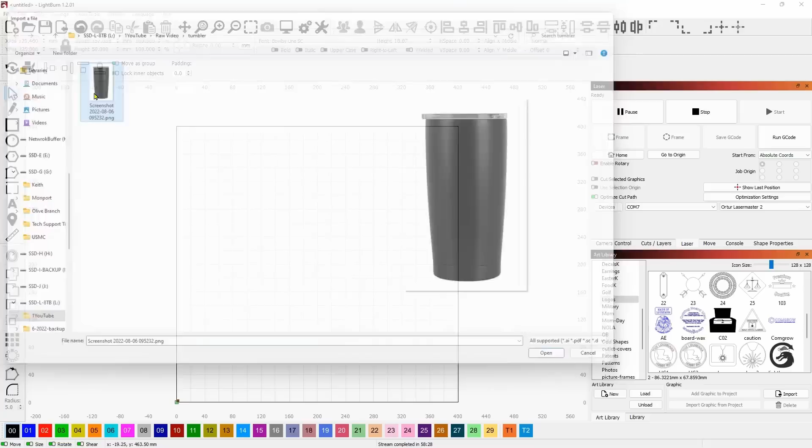All right, so the first thing we're going to talk about is, let me bring in this tumbler and how we're going to use it. Let's pretend that this is the tumbler that you're going to use right here, and it could be any tumbler, it doesn't matter what it is. The first thing we need to determine is how big is the graphic. So let's say that we have a graphic that is 2 inches by 2 inches.

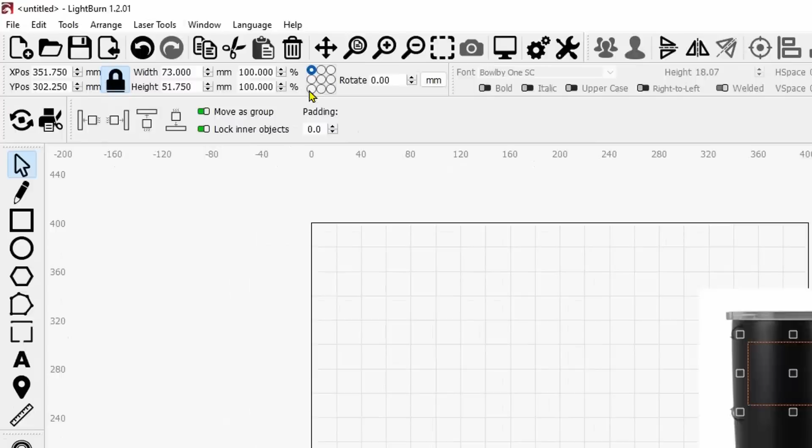Let's come up here, put this into inches, unlock it, and we're just going to say 2, press tab, 2, press enter, and relock it again - well, we don't even need to relock it, doesn't matter. So this is our actual graphic, 2 inches by 2 inches, and this is our tumbler over here. So what I'm going to do is quickly trace this tumbler.

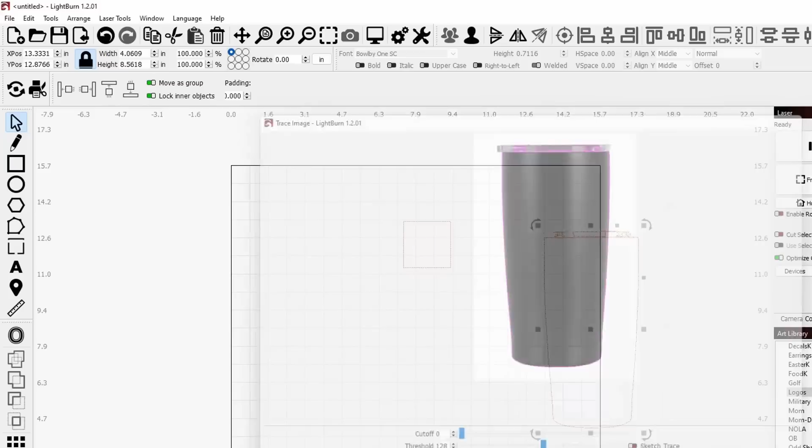And there we go, so there's our tumbler. Now let's say that this tumbler is 7 inches from top to bottom. Quickly, what I'm going to do is clean up some of this stuff up on the top so that we have an accurate representation here. So we're going to come over here and just do the height. The height we know is 7 inches from top to bottom, so I just did 7 and pressed enter, and of course it was locked.

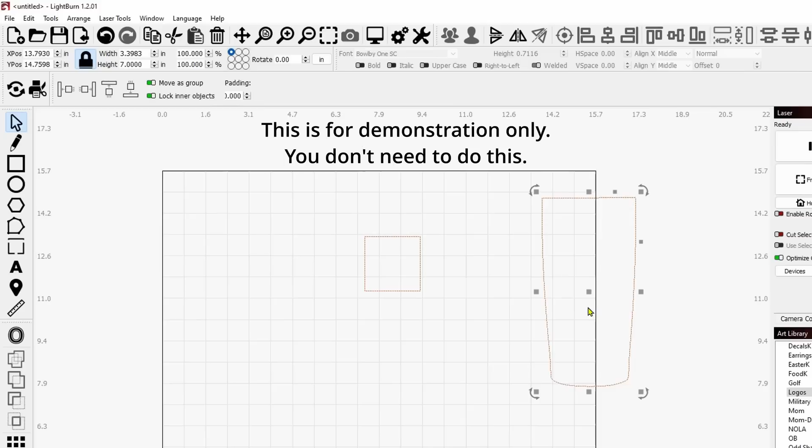So now it's proportionately sized. So now we know from the top of the anodized part to the bottom is 7 inches, and this is a pretty good representation of our 2-inch graphic that we're going to put on there. That's about how it's going to look. So at this point we have to determine where on the tumbler we need to take our measurement from.

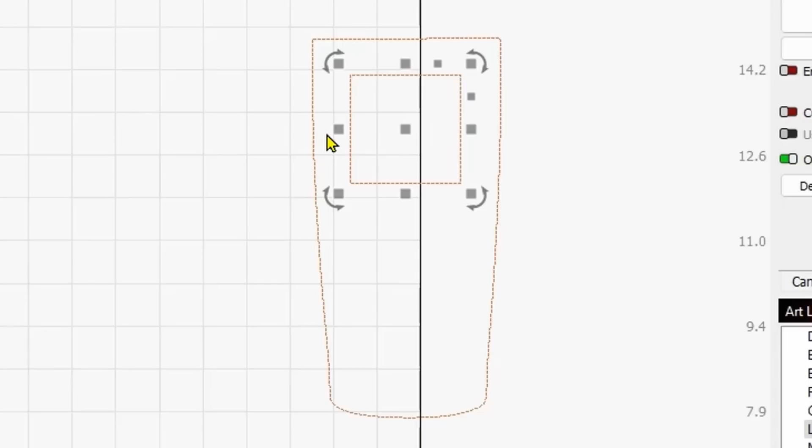So if the graphic is going to be right here on the tumbler, then we need to take our measurement right here, across here, for our diameter, excuse me - the diameter measurement is right here. Now if we were to take and put this graphic down here, let's say somewhere in the middle of that tumbler, in fact we can absolutely put it in the middle, just like that. It's directly in the center now. Now we know that we have to take our measurement right here.

And the reason for that is the focal distance is going to be different here than it is from here. So we're going to take a mean average, which is going to be right here. This is where we would take our caliper and make our measurement for the diameter of this cup.

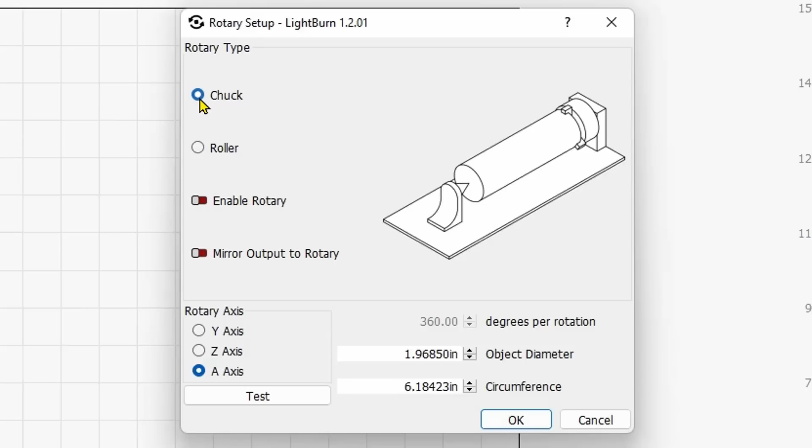Does that make sense? So now what we're going to do is we're going to come up here to the rotary icon. And if you don't see the icon, yours may be up here, could be anywhere on your workspace. You can come into Laser Tools and go down to Rotary Setup right here. So now on your RA2, if you have the X-Tool, it's going to be the chuck or the roller. Let's say we're going to use the chuck on this one.

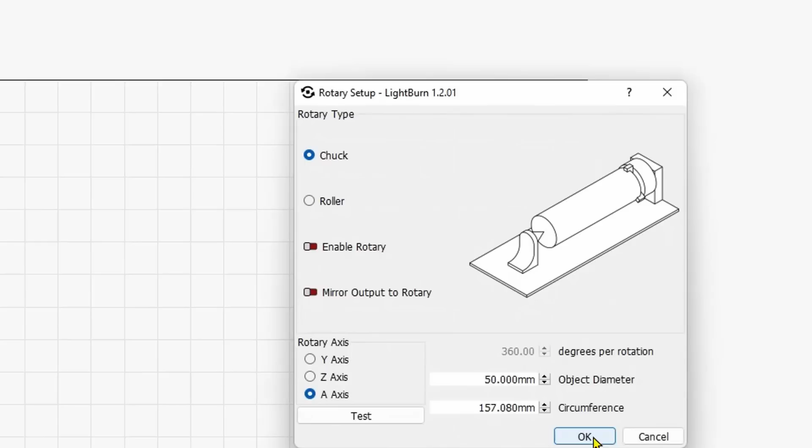We're going to click Enable Rotary, and we're going to take our diameter measurement over here. Let's say we measured this and the diameter was, for argument's sake, 60 millimeters. Actually let me put this into millimeters first, because that's what I like working with, is millimeters.

So we'll bring this back up, and let's say our object diameter now, the measurement that we took right here across the center, was 60 millimeters. Now it automatically calculates our circumference down here. And let's not forget that we have to turn on Enable Rotary, and with the RA2, it needs to be the Z axis.

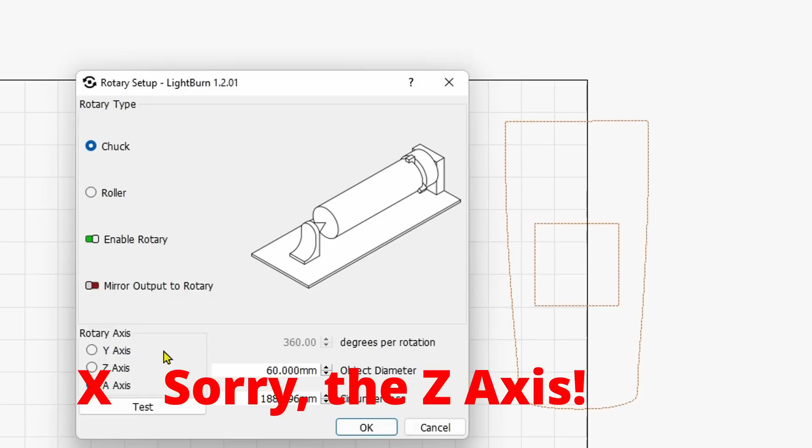Now if you have another roller, you might have to use the Y-axis. If you're unplugging the Y-axis and plugging it into your roller, that's the one you'd select. On the RA2 you would select the Z-axis because it has a separate port.

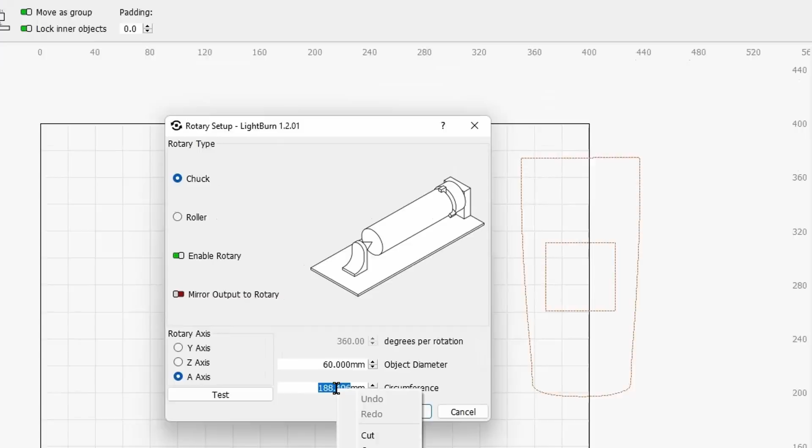So now we put our 60 millimeters in here, which is our diameter at the center, and we got this number right here, 188.496 as our circumference. Let's go ahead and copy that. We'll right click on it and copy it, and we'll say OK.

Now what we're going to do is take and draw a toolpath. Just like that, we're going to select it, unlock it, and in the width, we're going to paste that number that we just copied for the circumference. And we're going to press enter.

Now this is our workspace. From here to here, think of this as a piece of tape. If you were going to take this piece of tape and start right here, and go all the way around the cup, it would meet up in the same exact spot.

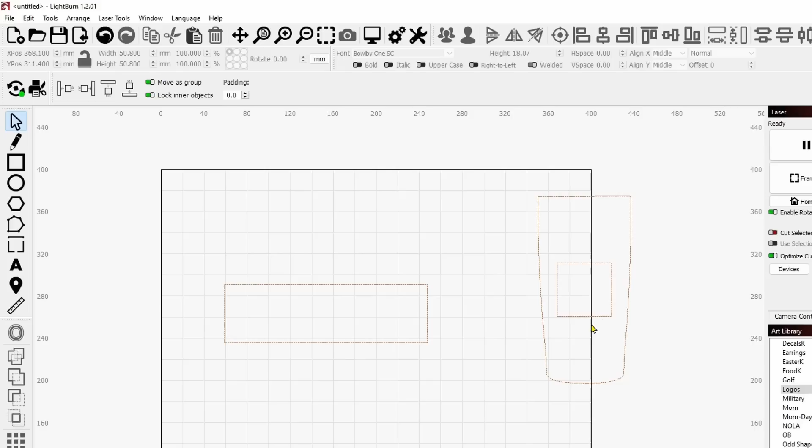That is our circumference. Now we need to determine how high the graphic is. So we know that this graphic is 2 inches by 2 inches, I believe. Yep, so it's 50.8 millimeters high. So now we'll select this one, come to the height, and we'll put in 50.8 and press enter.

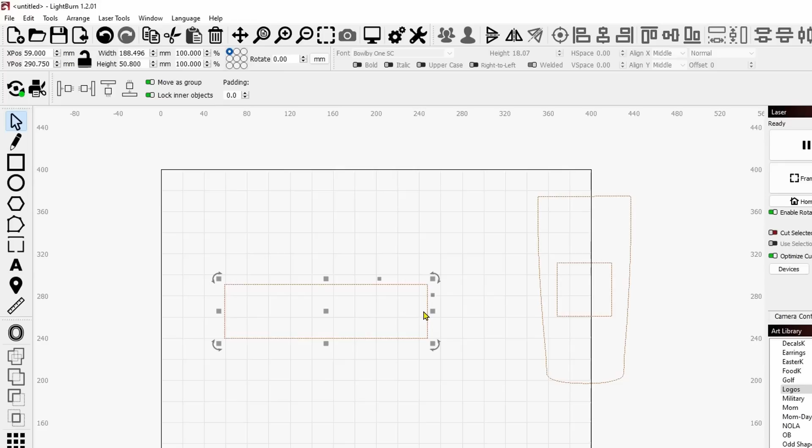Now we have our exact workspace. If we were to bring this over here, it's exactly the size of our graphic, and it will wrap all the way around the cup.

Now let's take a logo, any logo, it doesn't matter what it is. I'm going to use mine. And now again, these are just toolpaths over here. This was just to describe to you how to get started doing this.

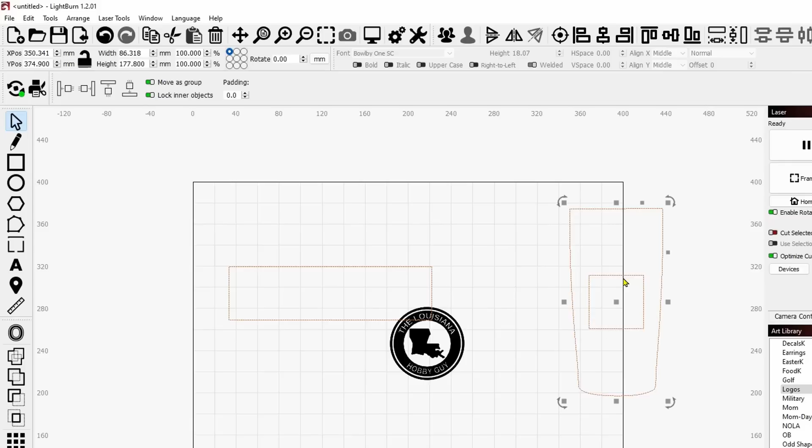Okay, so we're going to get rid of at least one of those. Actually, we'll get rid of both of those. So what I'm going to do now is determine where do I want this graphic. Do I want it directly in the center?

Well, if that's the case, then I can just select this graphic, press and hold down Shift, select this graphic, and come up to the top and hit the bullseye. And there we go, it's directly in the center.

Now all I would need to do is size it to fit the area that I want it to. If I hold Control, it will size proportionately from the center out. There is my graphic right there. It's perfectly centered and it's ready to go.

But a lot of people say, wait a minute, I want to put 2 of these graphics on here. And that's really simple to do. All we need to do is split this up into 4 pieces.

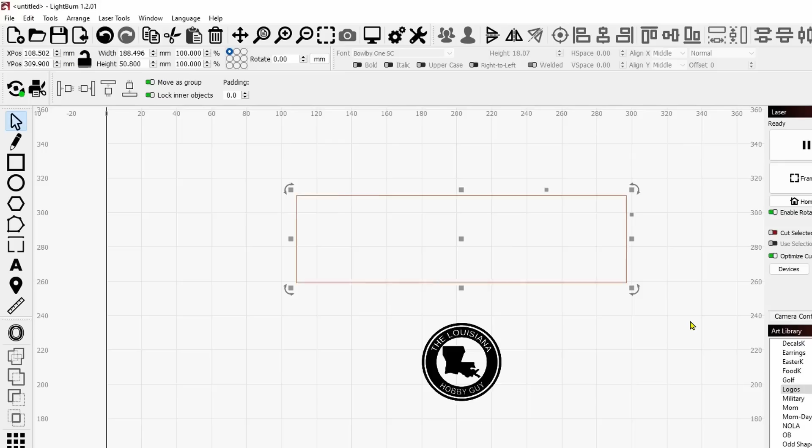So what I'm going to do is select the rectangle here. I'm going to press Control and the letter D, which duplicates it. Now once it's duplicated, it's automatically selected. The next thing I'm going to do is bring out a calculator.

Now if I look up in here, I know it's 188.496. You see the number right there? So if I come over here, 188.496, and then I do divided by 4 equals 47.124. All we have to do is divide that number by 4. And I'll show you why in a second.

So I'm going to copy that number. And over here, in the width, I'm going to paste this into the width and press enter. Now I have 1/4. So now what I'm going to do is press Control and the letter D again to duplicate it. It's already selected.

Once I've duplicated it, I'm going to hold down Shift. I'm going to grab the outer one and align it to the right side, just like that, by using my align key right here. Now we've actually only got 3 different ones here, but that's all we need is 3. So this and this are our alignment points.

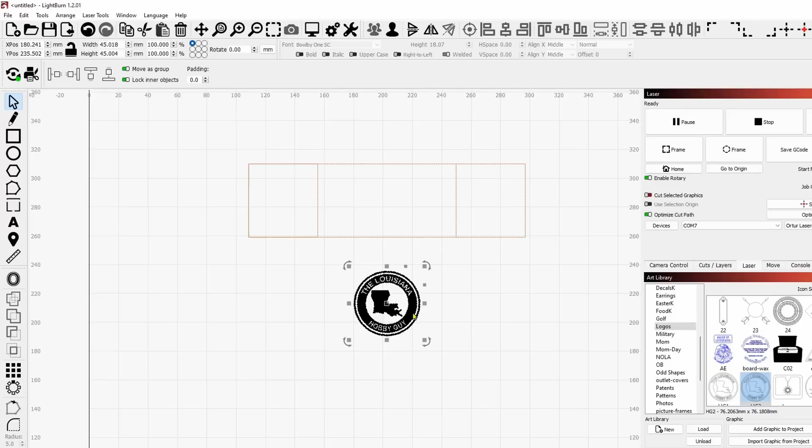So now I can come to my graphic and bring it right straight up here. And if I zoom in, you'll see that you have your little boxes right here, the handles. So I'm going to use the handles to align everything.

Now I'm going to look at this handle and align it to that line. I'm going to look at this handle, maybe align it to that line. Well, I'll use probably just the top and bottom. I'm going to hold Control, and with my arrow keys, move it up slightly. Now in the middle, I'm going to move it over slightly. So now you see it's exactly the same distance from the box up here as it is down here, and it's right exactly on the center of that line there.

And now I can hit Control and the letter D one more time to duplicate again.

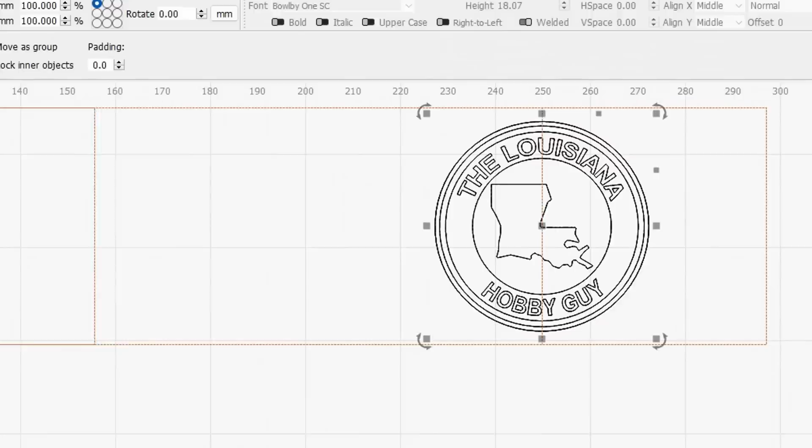Slide this over to here, get it aligned in the center, and there we have a double-sided tumbler. Now this is just our toolpath, that's all that is. That will not output, as you can see here. There's no output—all it will do is frame, and we don't even need it to do that, so we can even turn off the framing.

If we come over here now, the distance between here, going this way around and back into here, is exactly the same as the distance from here to here. So what that means is that if we were to wrap this all the way around the tumbler, these two would be perfectly centered on opposite sides. So there you go, that's just how easy it is.

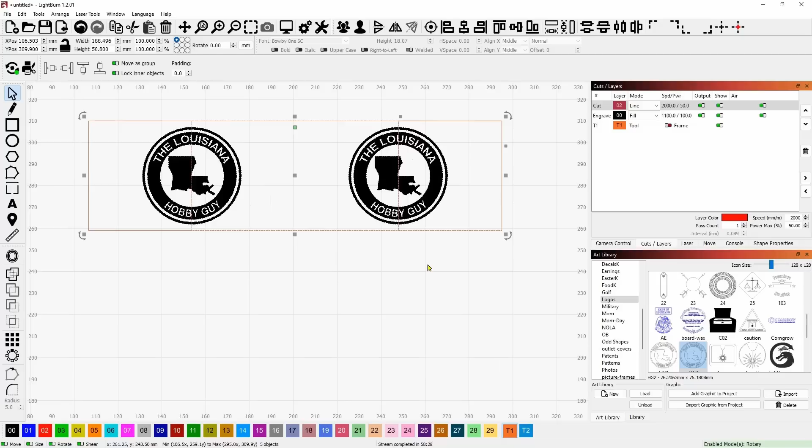Now I just noticed something—I've got a cut in here. Oh, my logo's got a cutout on it, so I'm just going to go ahead and delete that one. There we go, the only thing we should have here is engrave and the toolpath, and that's it. Now you don't even need the toolpath anymore at this point, but you can go ahead and delete these two and save the file if you have a bunch of these different mugs or tumblers that are all the same size. But this job right now is ready to run.

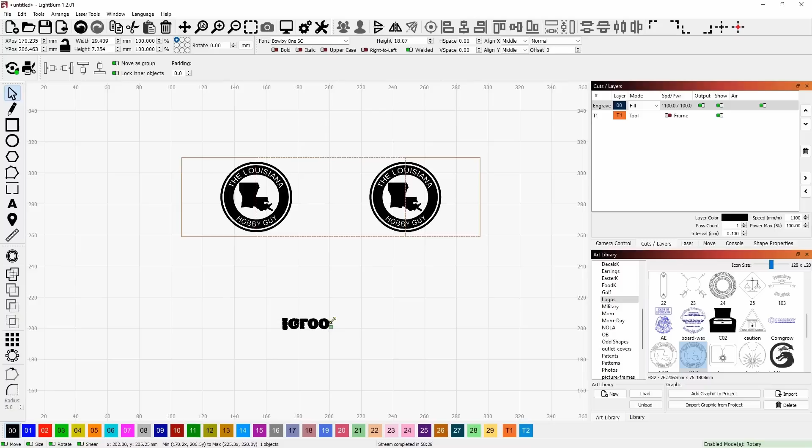Now this whole video is dedicated to the double-sided tumbler, okay? So the next question is, let's say I have a tumbler, and down here on the bottom it says Igloo on it—this is very common, you're going to have some kind of brand name that's going to wind up being right there in the middle, and you need to know how do I align these two so that one of them comes directly over the name down here on the bottom. That's also easy to do.

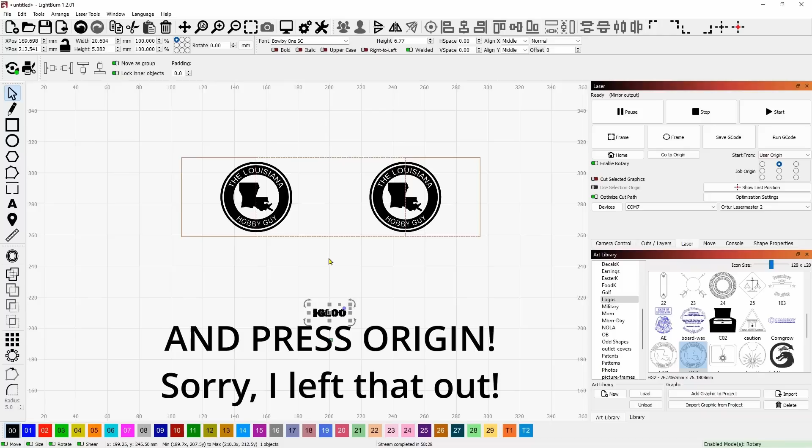If we come to the laser tab, what we're going to do is come over here to the start from, and we're going to check on user origin top center. At this point, where it says Igloo right here, you're going to turn your tumbler until the center line is directly over the center of the word Igloo. You can slide the gantry back and forth to make sure you hit the exact center of that word. And because you're in user origin top center, it's going to start top center right here, directly above the word Igloo.

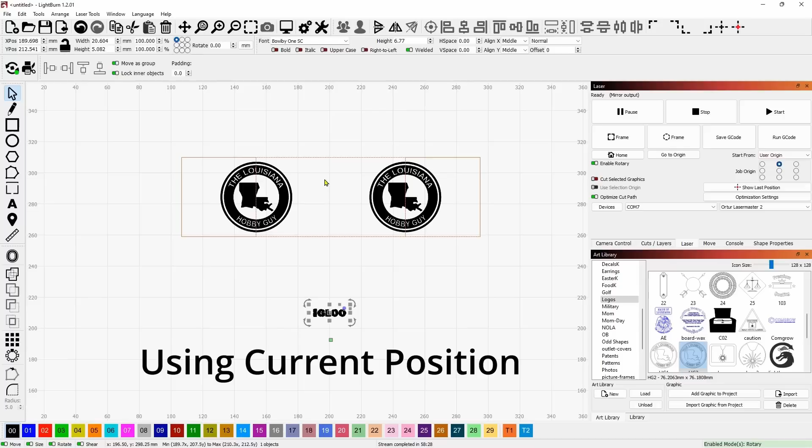I know that one's kind of hard to understand. Wherever you place the tumbler is where this graphic is going to start working, and you want it to start in this top center, okay? As long as that laser guidance line is coming through the word Igloo, just take your gantry and slide it right over the word, get the cup turned to the direct center of the word Igloo, then slide it all the way back to the left, and it'll be ready to run—your graphic will start right directly over that center word.

There's a lot of people that have this problem, that cannot burn a double-sided tumbler. A lot of people just burn them one side at a time, and this whole video is a waste if that's all you're looking to do, because if you're just looking to burn one side, you don't need any of this. All you need to do is design your graphic, size it, come over here to current position or user origin, line it up, and hit start.

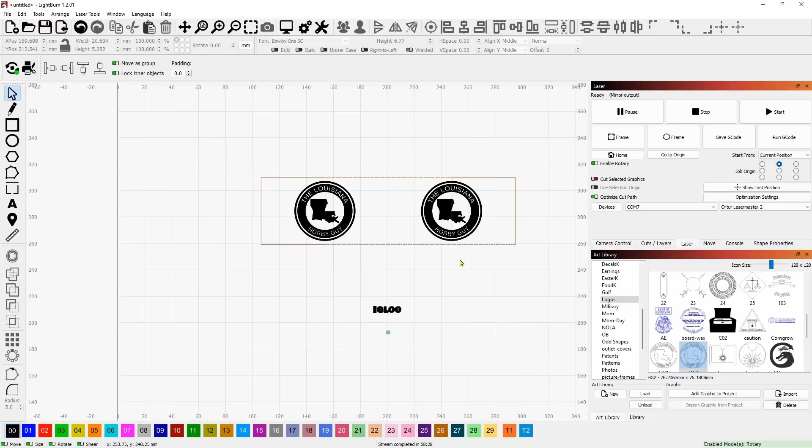This video was dedicated to the double-sided tumbler, and that's how easy this is to set up. There it is, that's everything. You've got how to set your graphics up, how to set your position up, and you're ready to run your actual tumbler. So I'm going to go run a couple of these off, and I'll be right back.

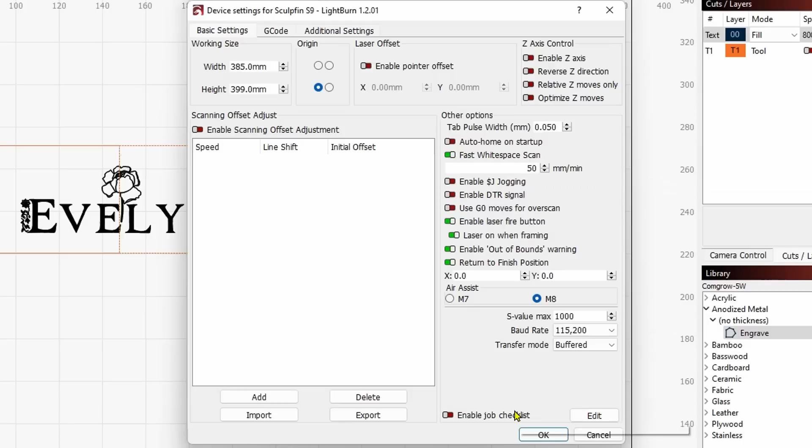There are a couple tips that I wanted to throw in here real quick, not to make this video any longer, but because I think they're important. So I've got my wife's design set up here, and I've got my template set up, and what I'm going to do is come up here and go to device settings. The first thing I'm going to do is change my white space scan to 50 millimeters per minute. Yeah, that's really slow—that's what I want, I want it to be really slow. Okay, so I'm going to say okay to that.

And then I'm going to double click on the layer, and I've already done this, but I just wanted to show you what I've done. I've put in here fill shapes individually down here at the bottom, okay?

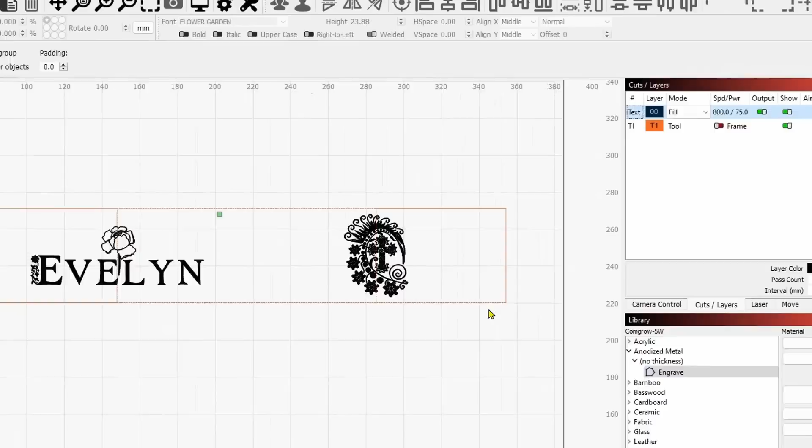And the reason why I did this, I put it at 308 DPI, fill shapes individually. I'm going to go 800 millimeters per minute, max power of 75. This is a 5-watt diode. So I'm going to say OK, and let me show you the reason why I did this.

So if we come back to the beginning and I hit play, what's happening here is that the laser is going to move the least amount of movements. Let me turn on show traversal moves here. Really what I don't want is it going left and right like that between both graphics, because I'm going to use a regular standard roller with this one.

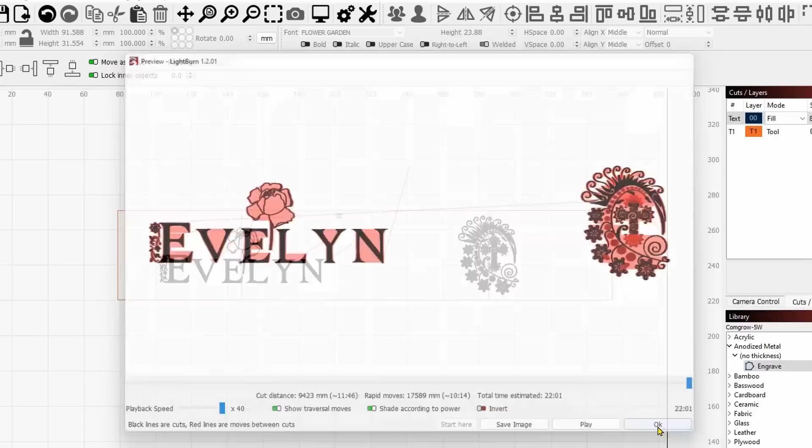So I want the least amount of left and right that's possible. You could even argue that you should change this from a scan angle of 0 to a scan angle of 90, and then do a preview again and watch what happens here. Now that took just a little bit of time off of it, but you'll see that there'll be less left to right rotation, where that tumbler is going to be spinning back and forth and actually walking down that roller.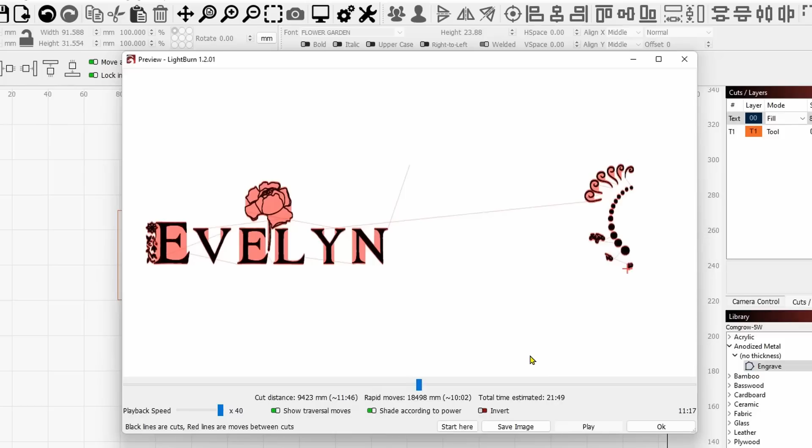Now you don't have that problem with the RA2, because it's not going to walk anywhere. It's held in there by jaws. But you do have the problem with a regular roller, and this is probably one of the biggest reasons why people don't get good even burns on their rollers, is because it's doing too much spinning back and forth.

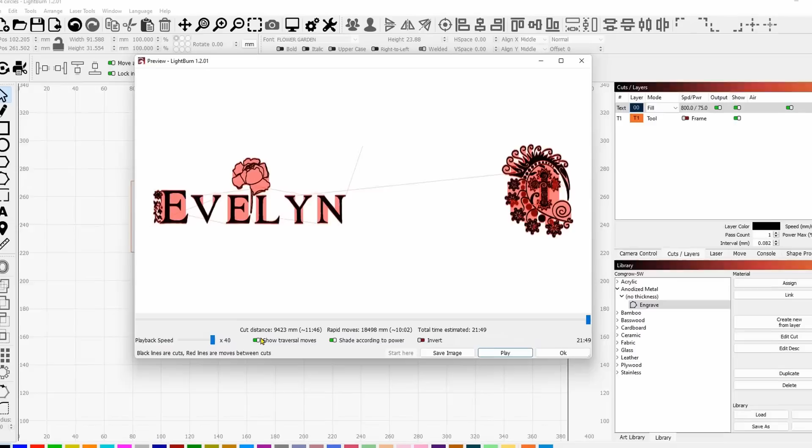And when you do all that spinning back and forth like this, then the tumbler is going to walk down the roller. It may only be 2, 3, or 4 millimeters. You might have it perfectly level, but that 2, 3, or 4 millimeters from here to here is going to make a big difference, and it's not going to come out right.

So that's just a couple more settings that I wanted to touch on briefly before we actually get into the burn itself. And then finally, the very last thing is come over to the Move tab right here, and this is one of the biggest problems that people have right here: speed.

Some of you are going to know exactly what I'm talking about. When you go to start the burn and do the frame, the tumbler spins off the roller and actually jumps completely off the roller. Well, this is your problem right here, your speed. What I'm going to do here is I'm going to lower this down to 50 millimeters per minute, and that is the number that we're going to use.

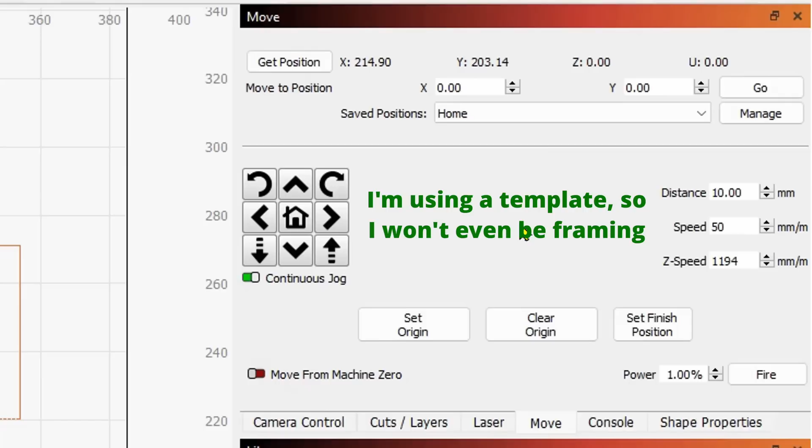So it's going to be a real slow framing process. That's okay. Hey, I want it to be really slow because I don't want the tumbler to move on those rollers. If this speed is too high right here, what's going to happen is it's either going to walk left or right, or it's going to spin right off the roller accessory itself. So lower your speed down 50 to 100 and take that extra minute to do the framing, where the tumbler's not going to move and you're not going to have any problems.

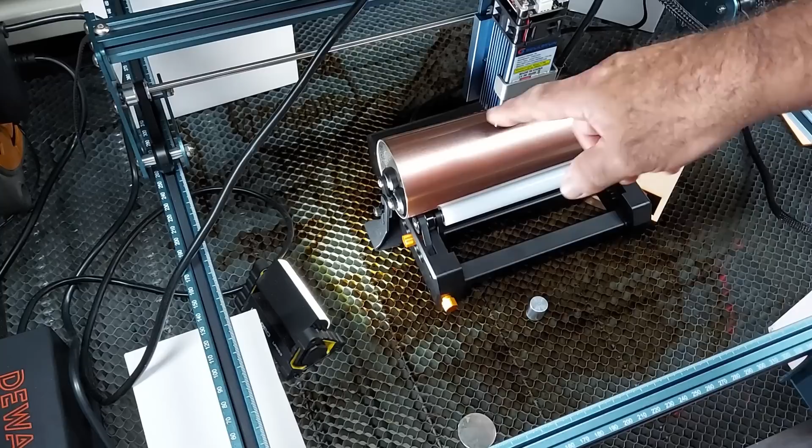So that's very important. Square to the frame, laser head, laser beam has to hit dead center, and I'm all set to go. Now, I did shim this up because I put my level on here to get it to dead center, and now that's perfectly level at the center. So what I did was I shimmed up the right side to make it level, and the reason I do that rather than keeping the whole accessory level is because the tumbler is going to walk no matter how level you have it.

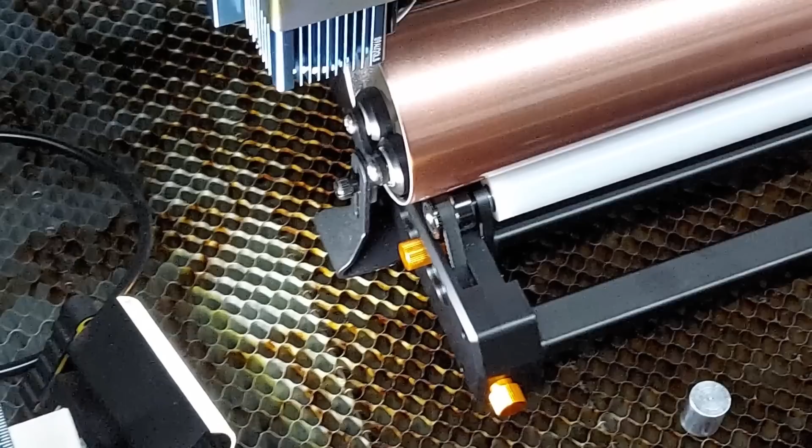As a matter of fact, if I can zoom in here, you'll see that I've used their champagne cup holder right here on the inside of the cup. So now that cup cannot move left, and I've got it just slightly higher on the right side so that if it's going to walk left... but now I know for certain that it's not going to walk left because I've got that on the inside and it's hitting up against the metal.

So that I think is very important. I don't always use that. I used to use just a block of 4x4 wood, that I put right there on the end and tip the right side up just a little bit, so that when it walks - and these will always walk in one direction or the other - so I always tilt the right side up just a little bit.

I level from the right side and make sure that it's coming up, and then I put a block of wood on the other side.

So next what I'm going to do is fire the laser at 1% on the move tab, and slide it over to about where I think is the center, somewhere in the center like that. Then I'm going to take my tape measure and find out where 100 millimeters is, and that's certainly not it. So I'm going to move it over a little bit more, and just a little bit more, and just a hair more. That is exactly 100 millimeters right there.

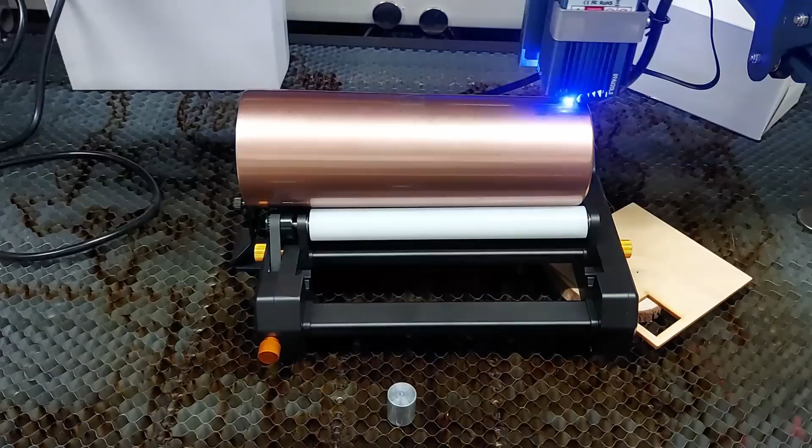Alright, so here we go with the actual burn itself, and you see it started directly at the center, and now it's running around the bottom. This rose gold is kind of hard to see, but I want you to notice that it's not going side to side, and that's the most important thing here, is that we've stopped that side to side movement.

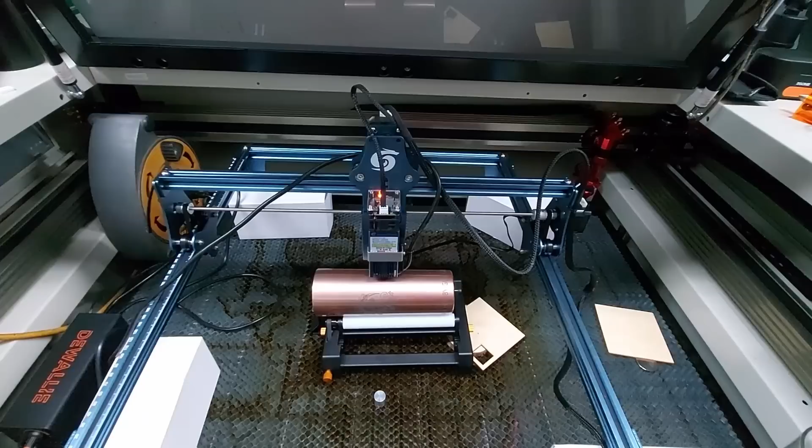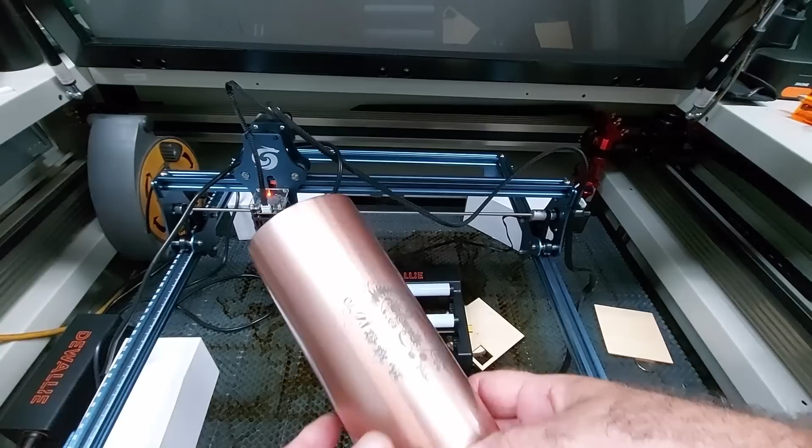Now it's finished. I'm going to pull it out from underneath those wheels over there. Let me slide this out of the way. I'm going to pick this up, and here is our finished product. And what I'm going to do is take some isopropyl alcohol and just clean it up a little bit like that.

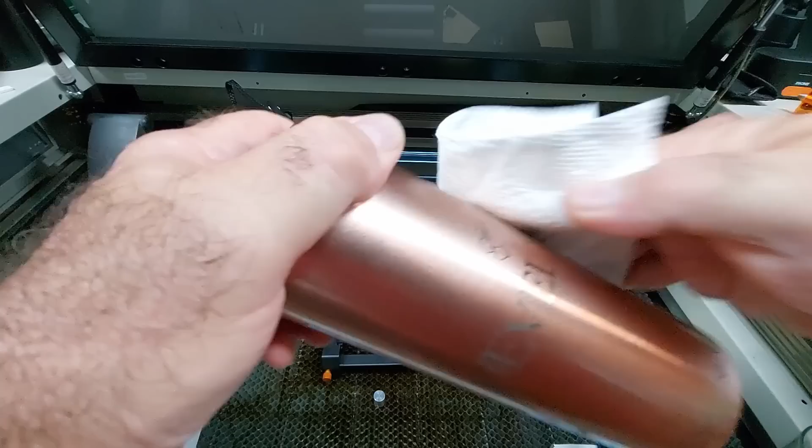I know with these lights in here, this is almost impossible to see on the rose gold, but I'm just going to go ahead and keep cleaning it. Maybe I should turn out the lights. Let me clean off this side real quick. And that's about it. So let me turn off the lights and see if we can get a better picture of this on the camera. Well, that didn't work. Well, maybe I can shade this a little bit.

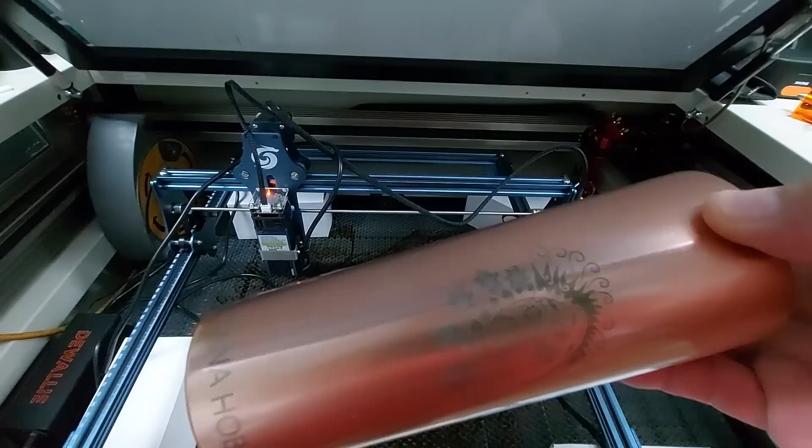This looks really wonderful in real life. This rose gold with these lights overhead is, let me see, maybe if I can dim that a little bit, is really beautiful. Comes out really, really nice in person. It's kind of hard to see on the video or with the camera, but the purpose of this video was to show you that here's one side, and if we spin it all the way around, there's the other side.

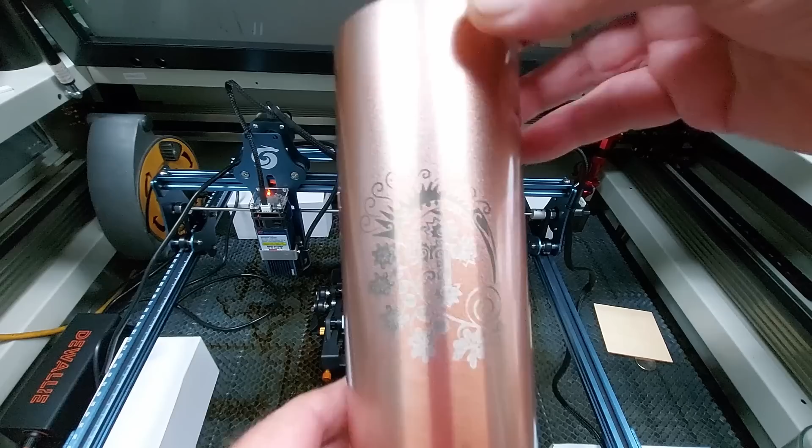And there's her name with the little rose on top going around. And we spin it around again, you can see that they're perfectly lined up on here. And on the bottom, you can see here it says all the way around, custom made by the Louisiana Hobby Guy, all the way around the bottom.

Now, if you had a keen eye, when I first started this, you'll notice that I didn't frame it at all. And the reason I didn't frame it, I wish I could get a better picture of this. Darn it, these look so really beautiful in person, the rose gold. But it just doesn't come out good on camera.

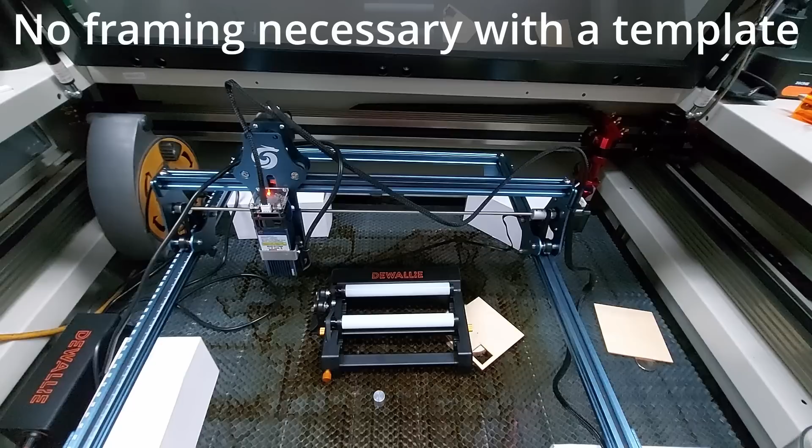The reason I didn't frame it was because a lot of these diode lasers run crazy when you try and frame it. They'll run back and forth 2 or 3 times, whatever. So I didn't have to frame it because I had it positioned right, current position, top center. I knew it would start exactly right there, and I knew that my framing tool, my tool path, would make sure that it was in the right position. So there's no need to frame.

So there you go, that's it. Start to finish on the diode laser. I wish I could get a better picture. I'm going to try and take a photograph of it in some kind of normal light, but it looks really outstanding in person.

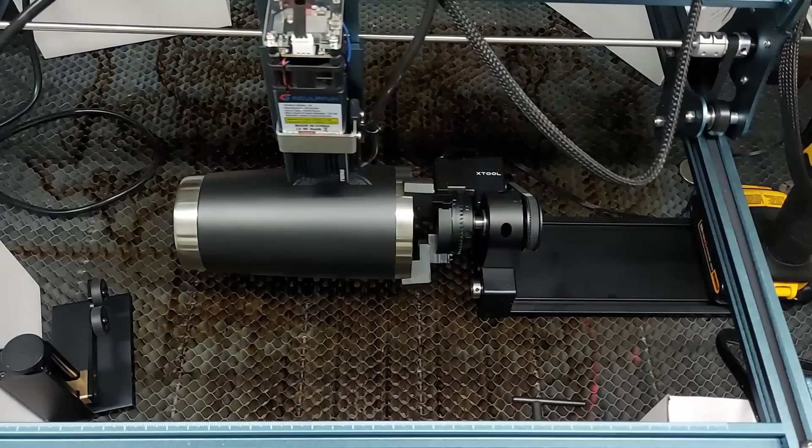Alright, so next up is the RA2 by X-Tool, and I've got this in the chuck rotary, and I've got a black tumbler so that you can see it a little better than the last one. I'm not getting into the settings on this just because this video was all about double-sided tumblers. So here's a double-sided tumbler for you.

All right, well, let's get it off of here and see what we got.

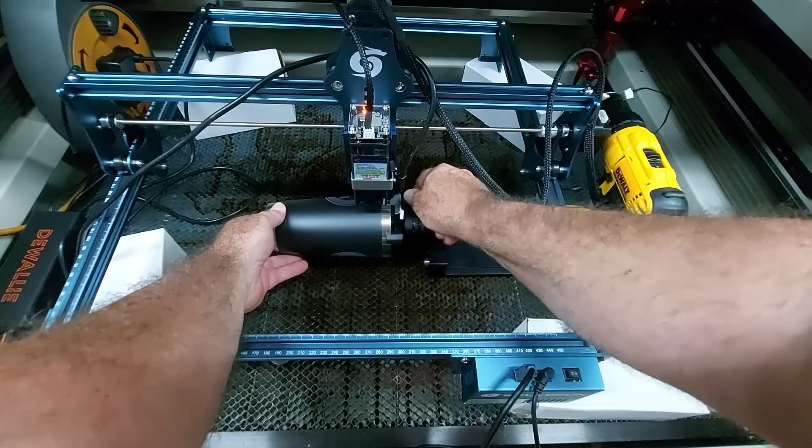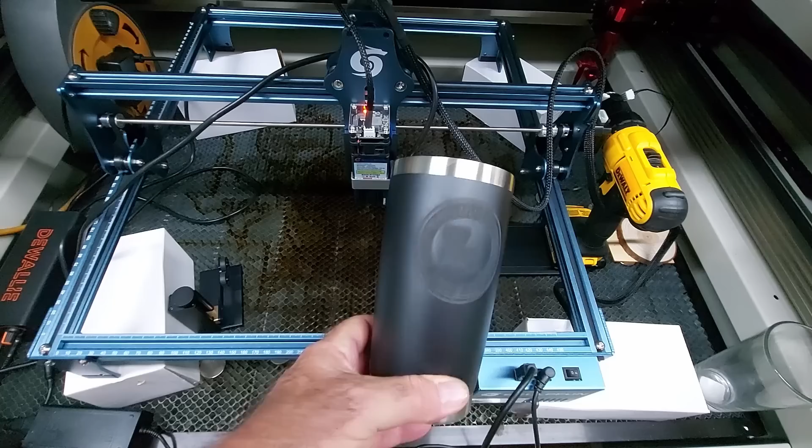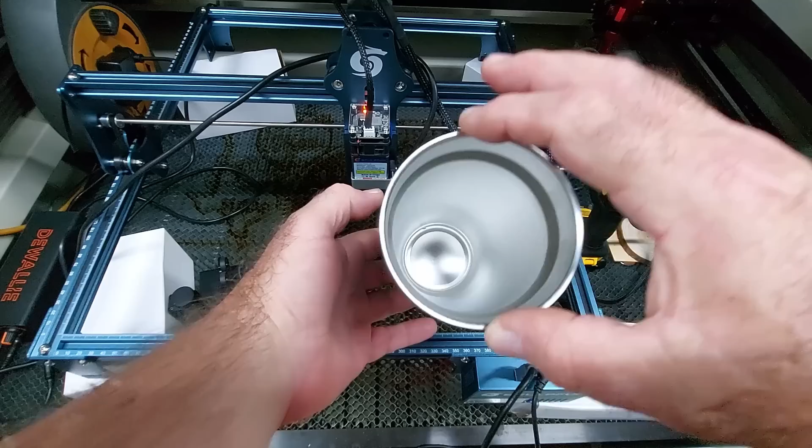Well, that didn't come out great, but I guess that's because of the laser. There's one side, there's the other. Let's see what we get. Here is dead center of this one. Here is dead center of this one. That looks pretty good to me. So we got one there, and we've got one there.

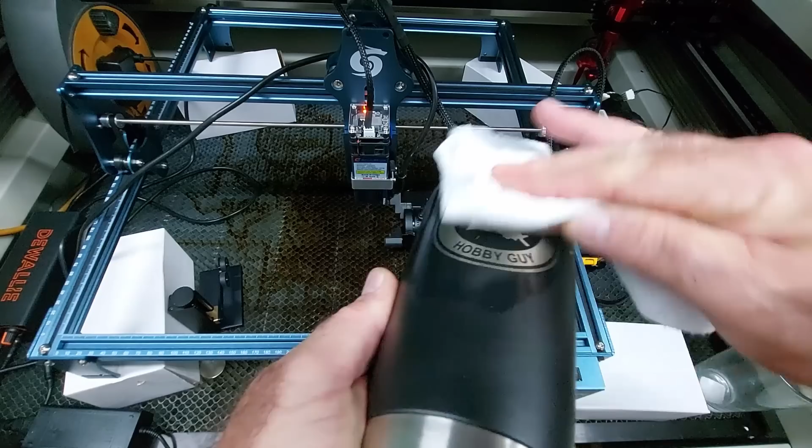Let's see what happens if I clean it up a little bit. I'm just going to take some alcohol and rub over it real quick, because it never looks good when they first come off, you know that already. Okay, well, how does that look? That looks pretty nice. Well, let's check out the other side.

I know a lot of people use other things, like those pads, but I just use a little bit of rubbing alcohol, and that's all I use.

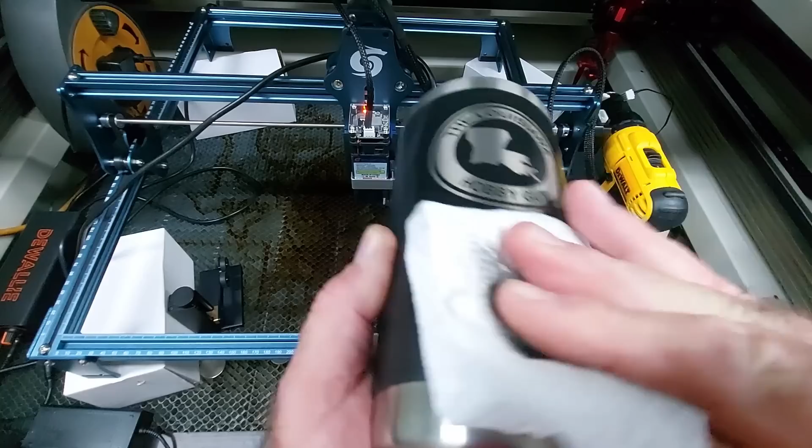And I think that looks pretty darn good, just the way it is. You can't really see how good this looks on camera, but I wish I could show you in real life that this came out really nice.

So there we go. It's a little bit oblong because I don't have the RA2 settings just perfect, but I can fix that. I think it did a pretty good job.

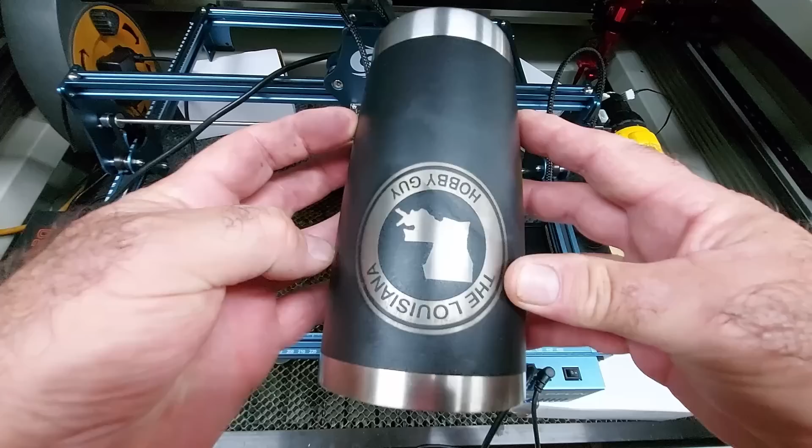Two-sided, it's perfectly lined up. Let me do it this way instead. So let's see, there is one side, there is the other. Center here, let me look on this side, center right there, and that is perfectly lined up on both sides.

Okay, that takes care of that one.

Being that I had the template already set up and I knew I had some of these waiting to be done, I figured I would go ahead and get these done and show you the results.

Now, there is something else you can do here too. You can offer these in either silver or gold engraving. Or I should say, it's not really engraving, it's gold or silver color.

If you raise your power all the way up to 100% and slow the speed way down, you can get a nice gold color out of this. It's like an annealing process. On the stainless, it turns gold if you have a lot of power.